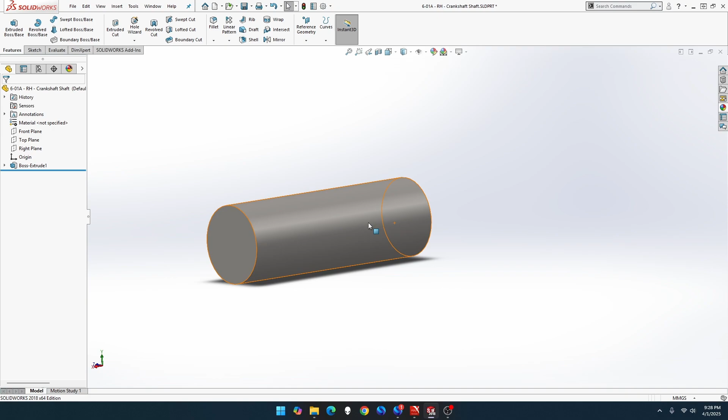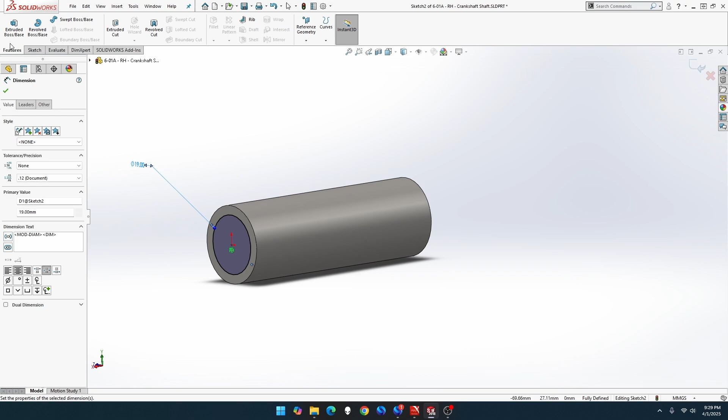There we go. Now this end here, we're going to go to sketch, circle, touch the outer edge, which brings up the center, which is in the XY coordinate there anyway, center of origin. That's going to be 19, that's smart dimension. 19, that's going to extrude out by 12. And done. So that's part 601A, right-hand crankshaft shaft done.

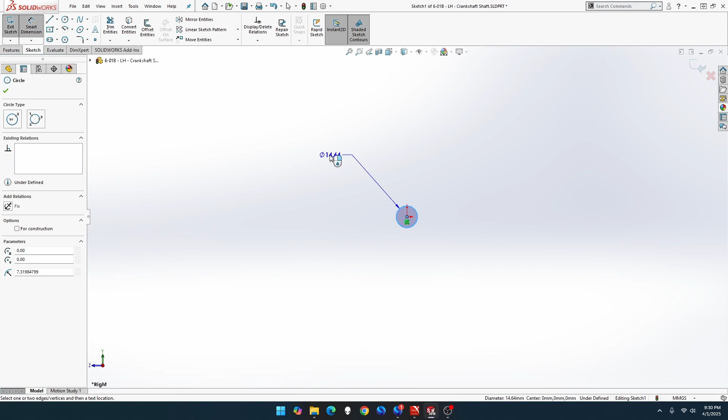Back down there, zoom in. Thank you, just so we can see it better. Up, zoom out a bit. That's going to be extrude, extrude the 12. Done. Let's do that one steel as well.

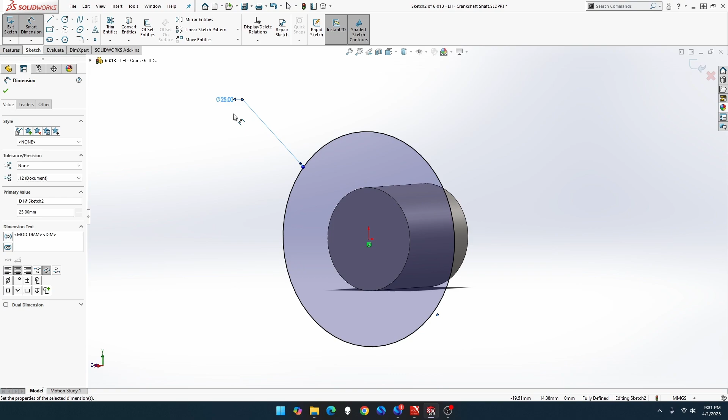There we go. Then we're going to do this face here, the circular face. It's going to be sketch as well, and it's going to be circle. And that's going to be dimension, that's going to be 25. That's going to be extruded out by 71.5.

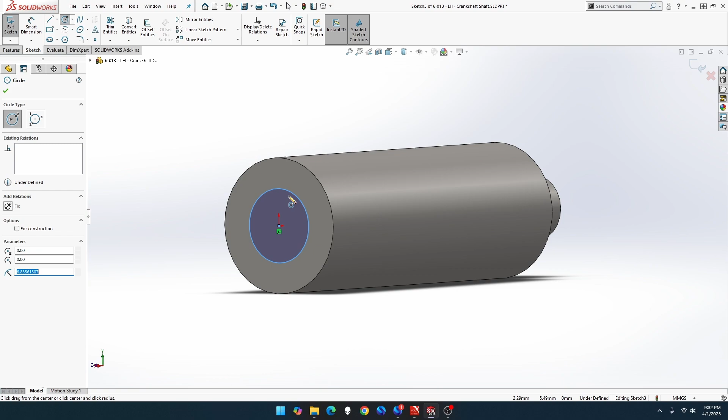Then we're going to do a sketch there, on this face here, it's going to be a circle as well. It's going to be 22. And that's going through that by 60. Thank you.

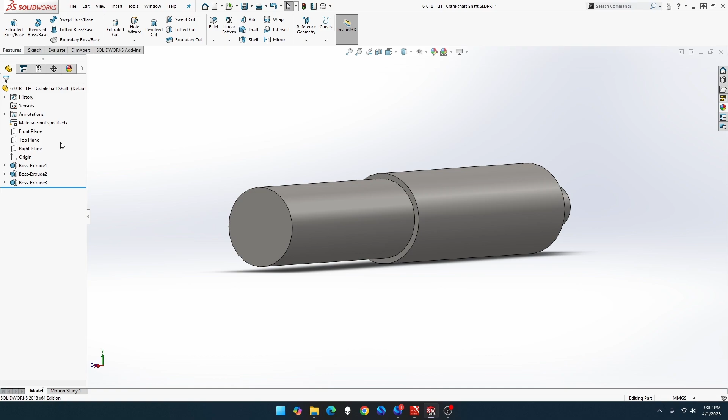Now we need to put 2 holes in this part here. One's going to be going up and down, one's going to be going left and right. So let's do the front plane first. Normalize. Let me just go that way. Doesn't matter which way, I just like to have the same weights in the drawing. Just for personal preference.

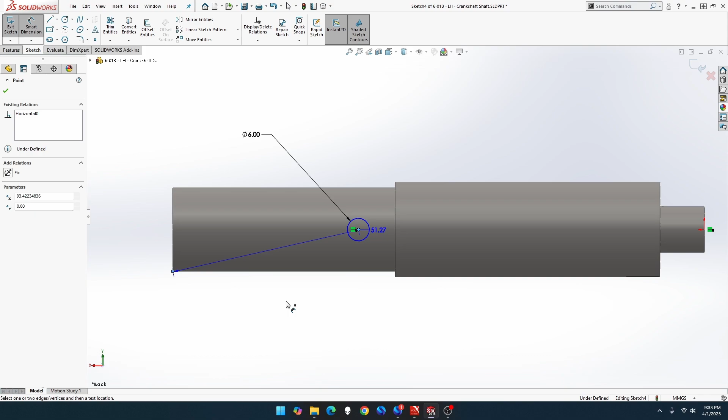And then we're going to sketch that. Now it's going to be 6 mil. Let's go 6 mil. We do that center point to the origin there. It's going to be horizontal, that's locked in that way. That's going to be 6. And that's going to be from this point or this line, works either way, to that point, it's going to be 51. Oh, it's far off, 51.

Now, because it's halfway through, we now go feature, extrude cut. This line works through, but this goes through all. It's second way through all, and done. There you go. So that one's done.

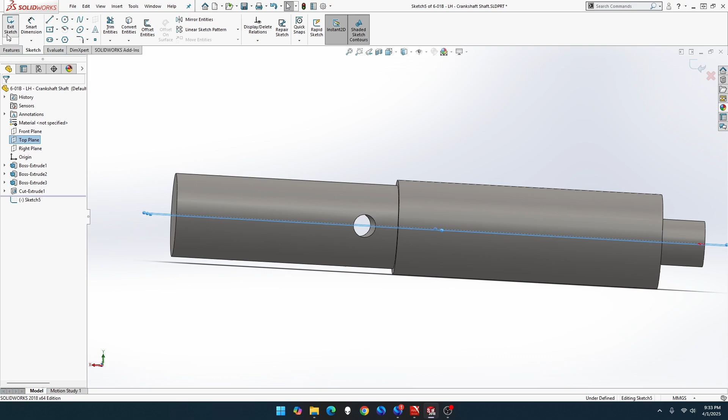Now we want the right plane. No, sorry, not right plane, top plane. Oh, I'll cancel that, we want to go normal to first. Always goes the wrong way. Okay, it's not flipping back and forth, that's fine. It's going to be sketch, circle. It's going to be 6 mil as well, I believe. Yes, it is, 6 mil.

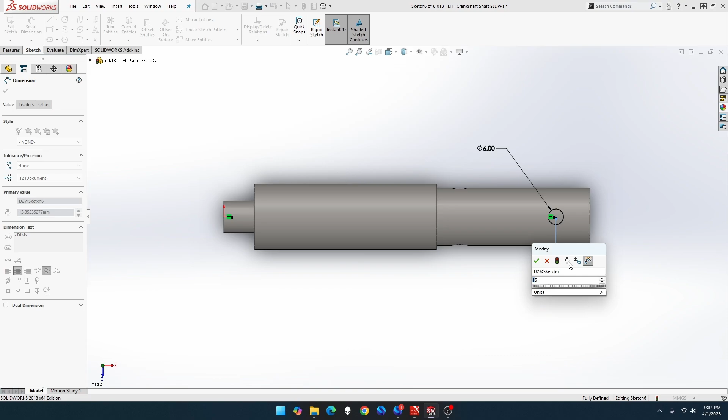That point is going to equal that point, so the center origin there to the center of the circle. It's going to be horizontal. Smart dimension, it's going to be 15 from this line to the center point. 15, you can use the point or the line, works either way. Now if we go to exit out, extrude cut, through all, direction 2, through all. There we go, obviously. And that should be it.

That's it for part. Oop, wrong one. That one, thank you. That is part 601B, left hand crankshaft shaft done. Let's move on to the next part.

Alright, so I go file, new, part MMGS. Okay, this is part 601C, the middle crankshaft shaft. Let's go right plane, circle, sketch, sorry, then circle.

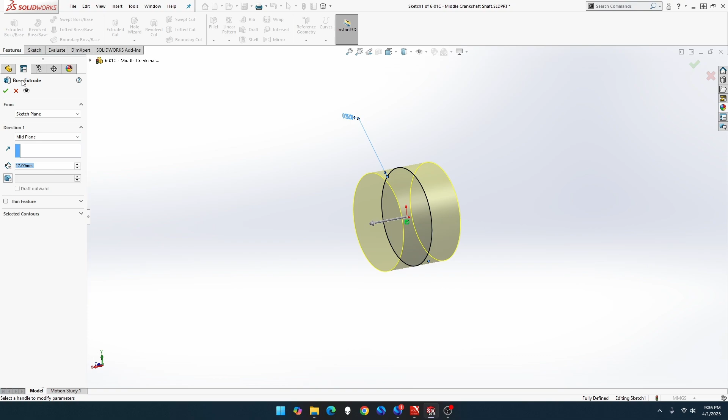That's going to be 25, so smart dimension 25, 25. Now you can do one of two ways. Let me piece this part off. Feature extrude, and it's going to be 17. If we go mid 17, okay, let me just change that over to steel before I forget. Now it's got a cylinder this way and this way, so you can edit that way, pull it out, edit the other way, pull it out, or go halfway and extrude out each way at the same distance. But I'm just going to go with this way.

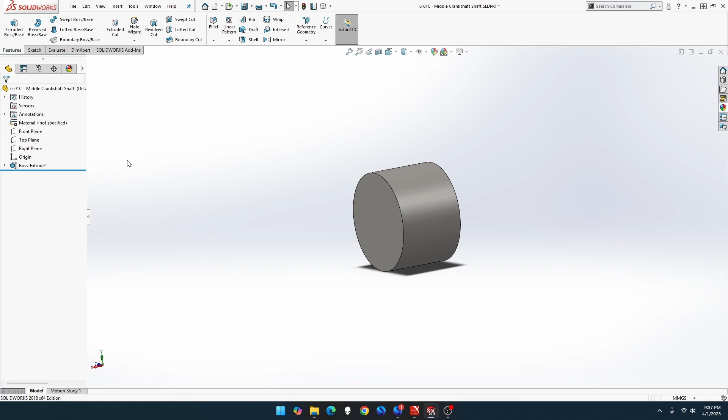Just got a dimension straight there. Yeah, work it out easily, but just one thing to worry about. Actually, no, let me go to front, right plane. We're going to edit sketch. We're going to do a circle.

That circle will be, where are we? 19. Now we're going to do feature extrude. It's going to be extrude up to, that's 17 divided by 2 plus 12.

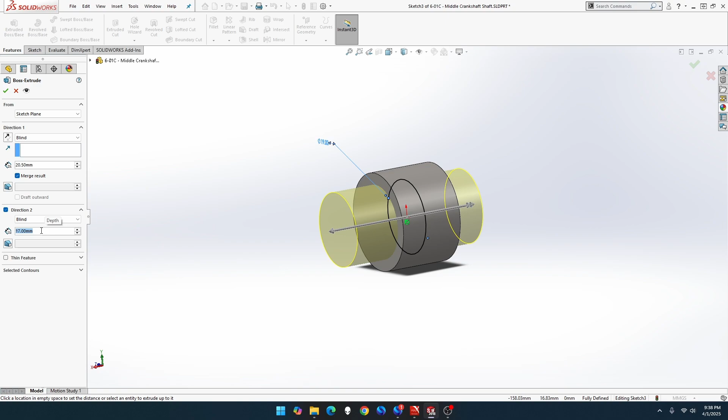Now we're going to extrude the other way, which is going to be 20.5, 20.5, and done. There we go.

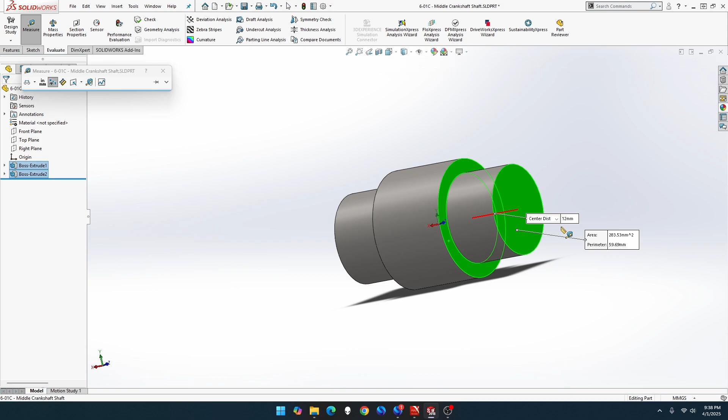Now if we just go with evaluate, measure, we click on this face and that face, that should be 22. 12, sorry, my mistake, 12, not 22. 12, which is correct. And this side should be 12 as well. There and there, which is 12 mil. Perfect, and that's that piece done.

Let me just zoom that around. There's a way to turn a shadow off, I can never remember how, I keep having to look it up.

That's part 6-01C, middle crankshaft shaft done. Let's build the next piece. Let's go File, New, Part MMGS.

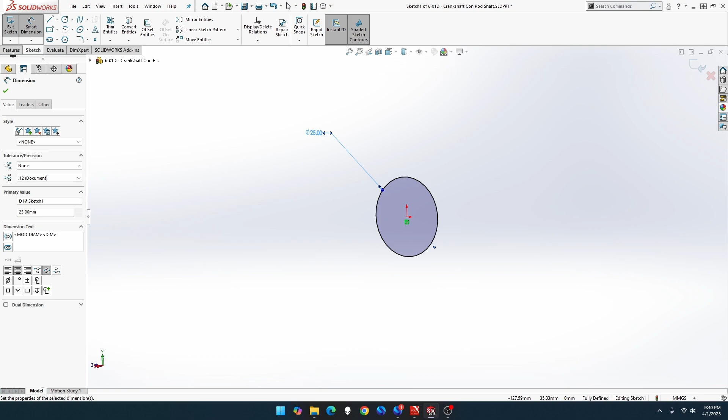That's going to be 19, I believe. Sorry, 25, 19 is smaller pieces. 25, that's going to be extrude of 29. I'm looking at the wrong dimensions. Extrude of 29, I'm just going to do that mid-plane. Okay, let's do that one there.

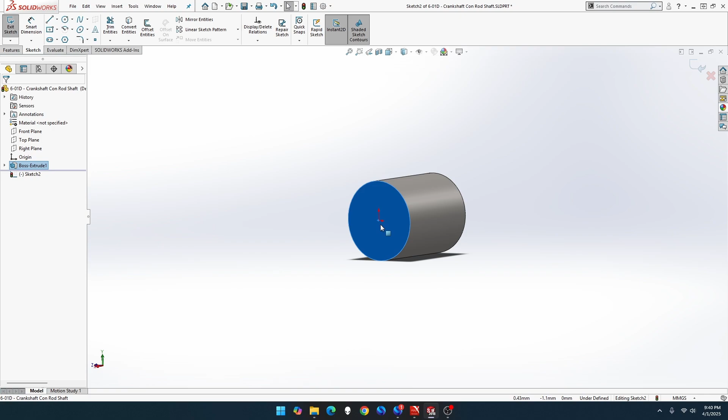Beautiful. Now we're going to do this one from each end this time, so you can see both ways. So we've got circle, do sketch on that end first, but circle. That should be the center of that one. It is. Oh, help to select circle, right? There we go. So why is that not showing up? It helps if you have the item selected you want.

Now this is 19. Feature extrude 12. Done. There we go, beautiful.

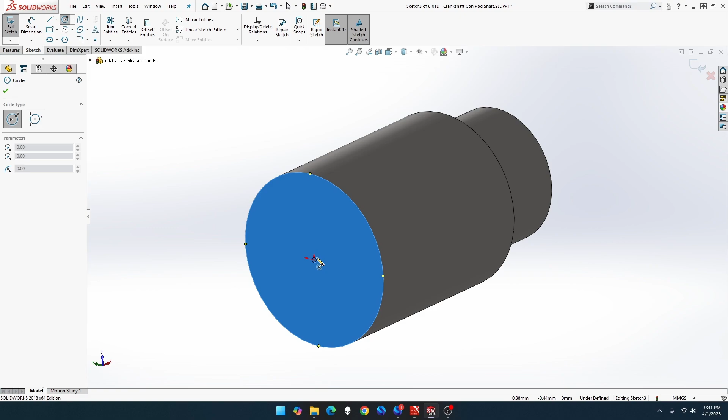Right click that one, sketch, circle, touch on the other circle. Thank you, touch on the other circle and change its center point there. It's going to be 12 as well. 12.

19, done again, didn't I? 19, it's going to be extruding at 12. And done, there you go. That is part 6-01D crankshaft conrod shaft done.

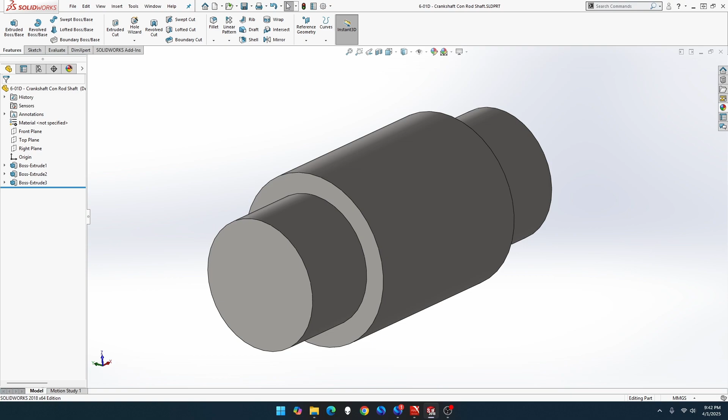Got one more piece and we start assembling it. Let's go File, New, Part MMGS. Alright, this is part 6-01E, the crankshaft crank cheek.

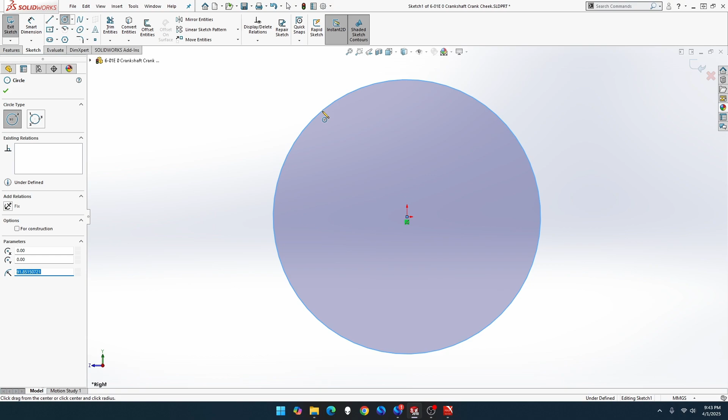So let's do right plane again, sketch. We're going to do a circle. That's going to be diameter of 76, yes 76. Perfect. And then we're going to do another circle, one there, one there. Those two will be vertical.

And these two, click on the outer edge, will be, not that one, equal. And that is 19, so smart dimension, 19. And that's going to be center point of the circle to center point of the drawing. Go this side, 19.

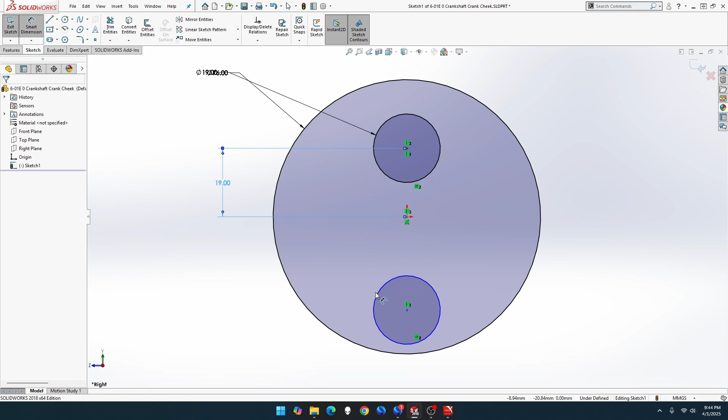Oh, one thing I've got to do, this center point to one circle vertical. There you go, now locked in. I think, why did it not lock in? Yeah, because I put the two circles vertical, but then put it vertical to the center point. And that's going to be... oh, cancel, center point on one, my bad. There we go. 19.

Okay, so now we've got another hole. Bring that one up to about there. That's going to be 6. 6.

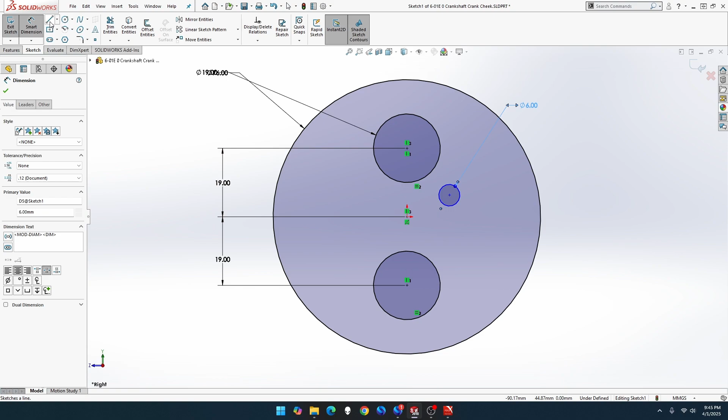We're not going to dimension that just yet because I've got to do something else. So we're going to go line, click on those two points there. Oh, don't want curve. And one this side. Make those two parallel, actually, yeah, parallel.

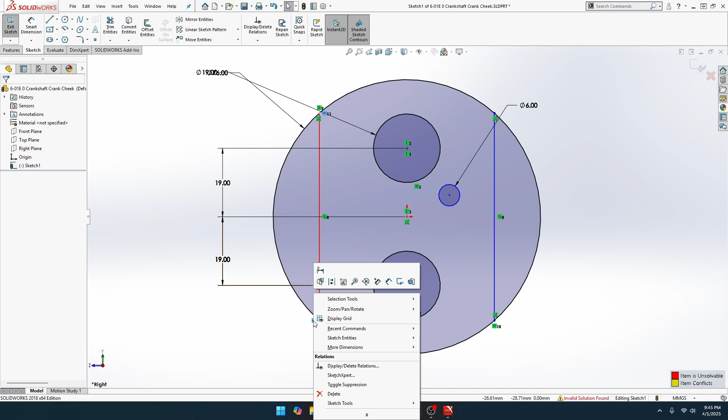Point to point is going to be vertical. Now this point and this point of the end line will be horizontal, and those two should be horizontal already. Why is that over-defined? Oh, I already got one there. To delete one of these points, just click on highlight and press delete key. It's no longer over-defined.

Now for dimension, we want center point. Actually, you don't need to do this, but it's recommended. I'm going to put in a center line instead. Smart dimension, center point line to that line will be straight. That was 19.

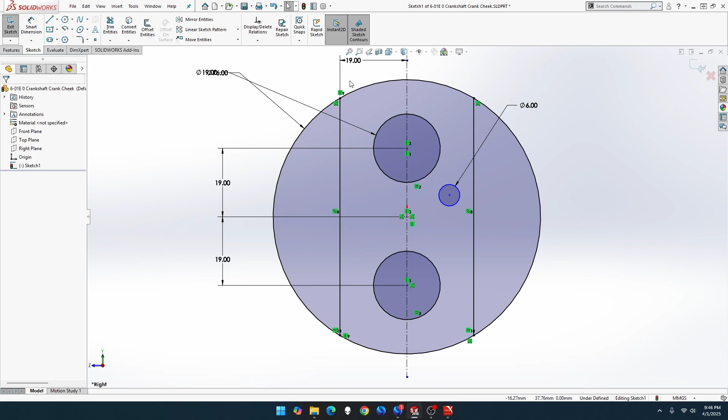Now we go to trim. I'm going to trim that one and that one. So that did not break. Let me bring that one down there. It did not break the dimension on that because it's still got dimension there.

So everything is black except for this line, which is blue. Let's now go back to dimension. That is 9.8 from center circle to that line. And that's going to be, from this center point to that center point, 12.6. That's locked it in.

You don't want that line there for the circle, just move that down there. But I don't mind that one. Everyone has their preferences. Let's just pull some of this in, make it a little tidier. Pull that in there. Actually, I can bring that one down there. Actually, nope, that can go there.

It doesn't really matter. Well, it does. It keeps it tight, so if someone comes in to do the drawing later, the numbers aren't all mumbo jumbo everywhere. Sorry, one of my pens got in the way of my mouse. Put you back there.

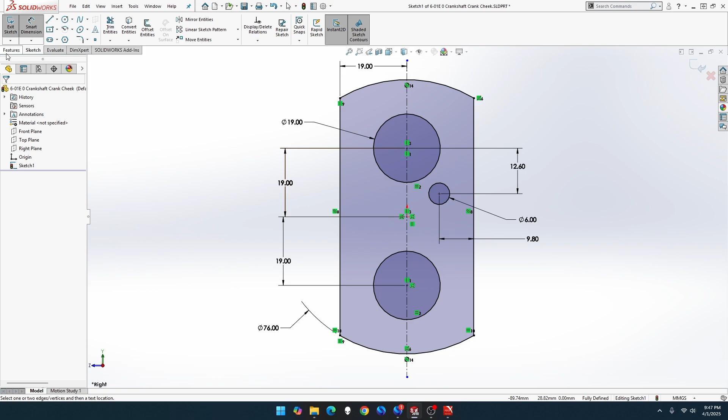Okay, so now let's just double check. Looks good. It's going to be an extrude of 12 mil. I'm going to do blind on that one.

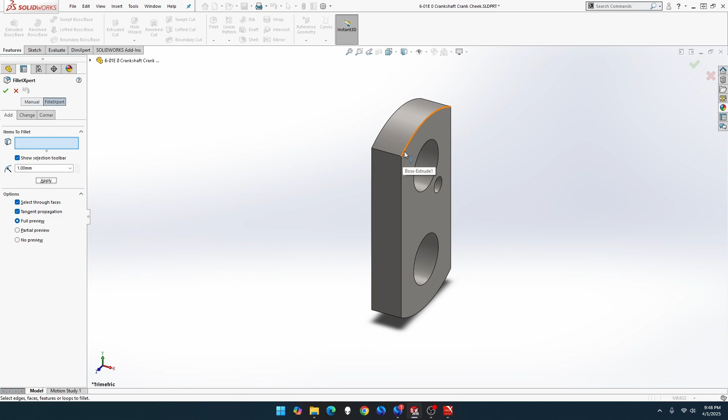Now we want the steel, and we want a fillet of, let's try one, see what that does. Looks good. And do this side as well, and that one there. Beautiful, that should be done. That's it.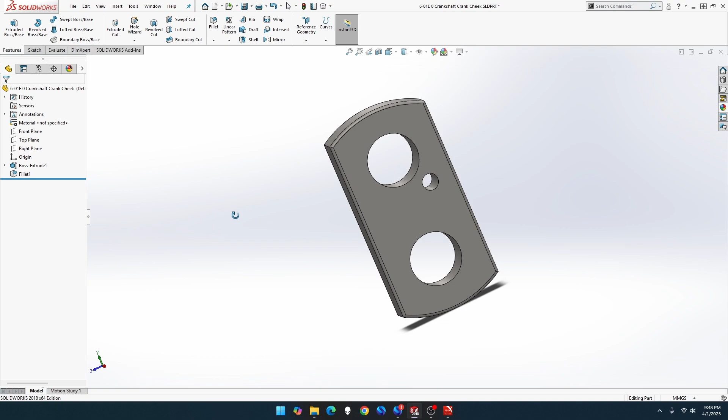Let me just zoom this around a bit so. Oop, not there. That looks good, I'm happy on that.

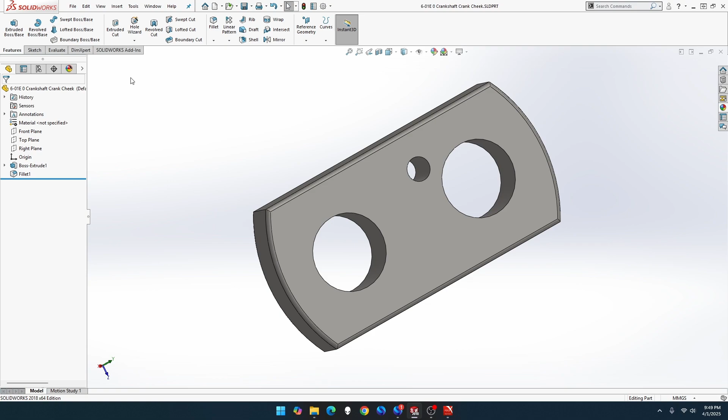All right, let's assemble this now. Let's go to File, New. It's going to be Assembly MMGS. Let's go to View, Hide Show, Origin.

And I'm going to put part A, I guess. Let me just click on that icon there, so that this doesn't close down. So if we bring that one across and click it there. Now we want 6.

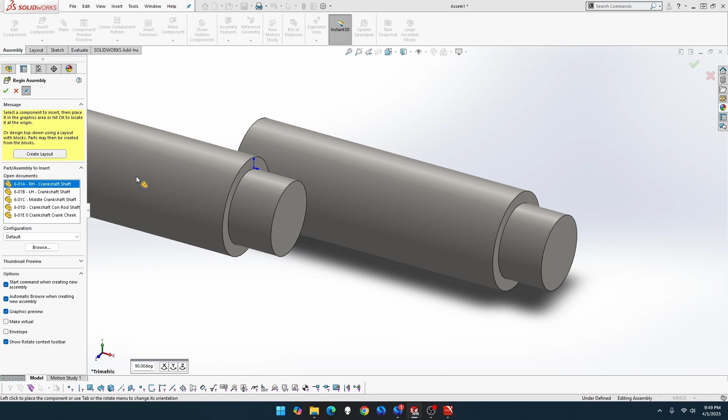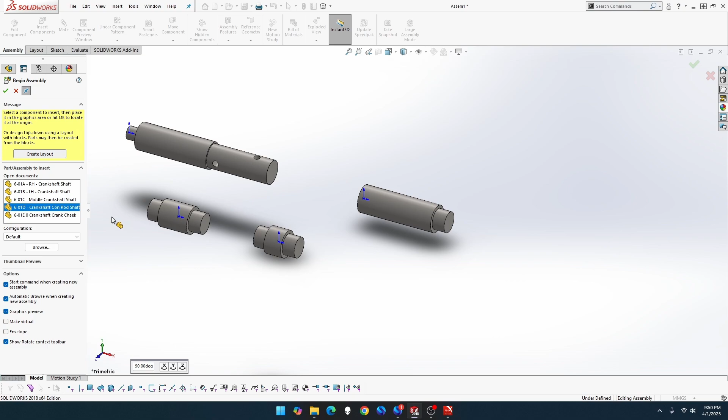I think we've got one of those. Yeah, one of them. B, there's one of those, I believe. Yep, one of those. C, there is one of those. D, one of those, and then E, sorry, there's 4 of them. So 1, 2, 3, and 4.

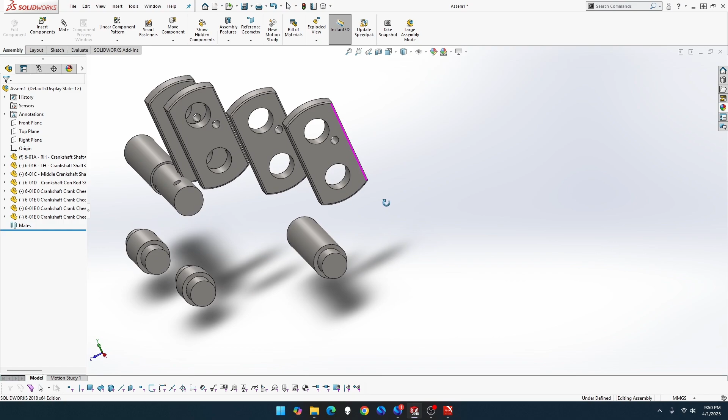And that one's done, there we go. Let me turn that origins off, it's so overcrowded there. There we go. All right, so now we want to turn it this way. There we go.

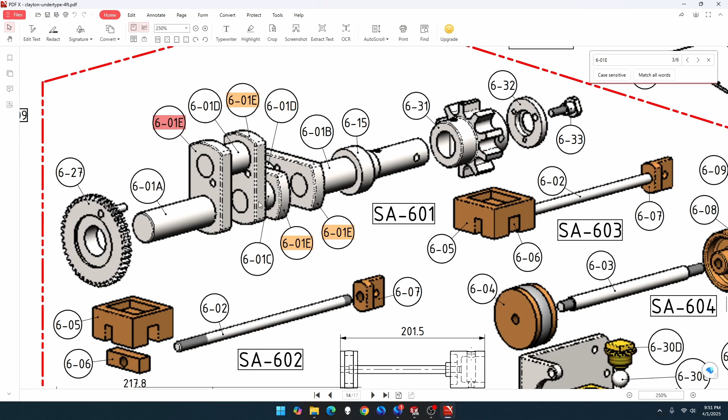So let me keep that piece. Oh, hold on, that way. Nope, that way, sorry, my bad. I'm trying to keep it lined up with the piece here, same reference to here, so that way I can see. Let me just move you up there. Which one? That's one I can't move. Okay, that's one that's locked in.

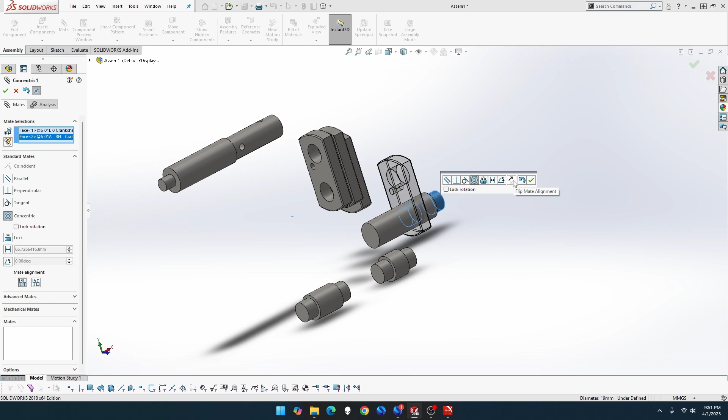Now we want this one vertical, so let's do this face to front plane. There we go. Okay, let me get out of that.

Now, if you do too many mates in one row, a heap of mating, and you make a mistake, Control Z is going to undo all those mates together. That's why I like to do a couple of mates, okay, a couple at a time. That way I'm not clearing a heap of mates already done.

Okay, that's good there, the holes on that side, good. Now we want, that was E, we want D. That's C, D, there we go. Mate, circle, beautiful. Now we want that edge there to that edge there. Beautiful, just going to okay that one, so I don't have to do it again.

Now we want one of these. Yep, so we want mate.

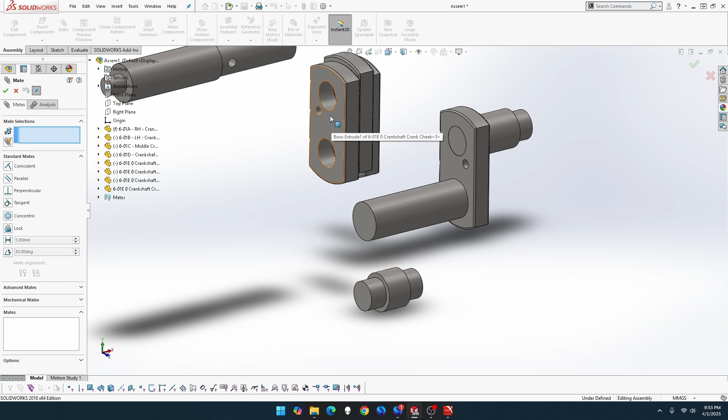Circle, inner circle to outer circle. Now, if you click on that, you can actually drag these out like that. So if it's in line with something, you can't get to it. It's a flip adjustment.

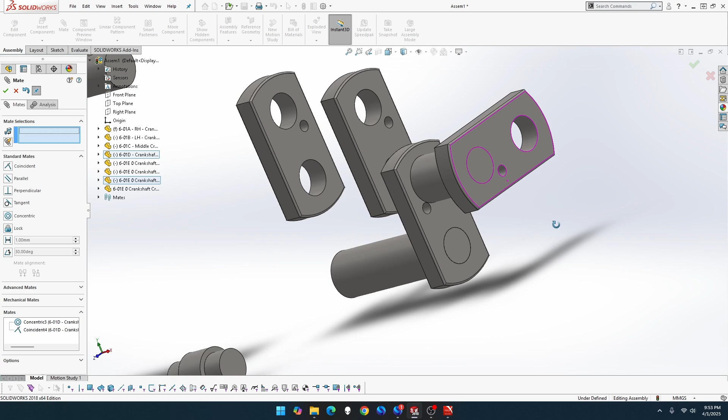And then we want this face in line with that face. There we go, it's looking good. Now we want, probably going to be this one. C. Yep, C. On that, thank you.

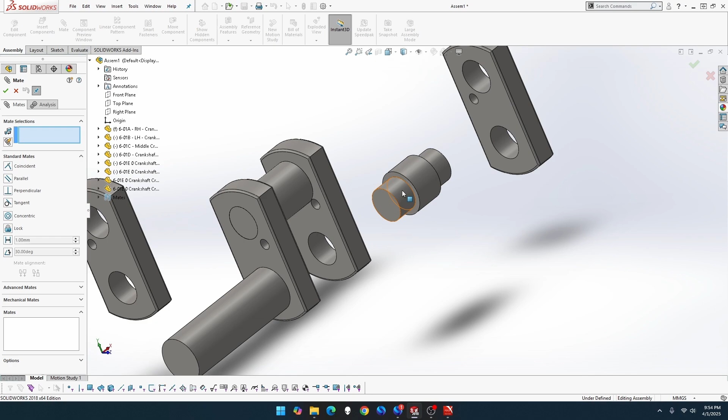Now we want mate, circle. Outer circle this cylinder there to inner circle of the hole. That face there to that face there. There we go, looking good.

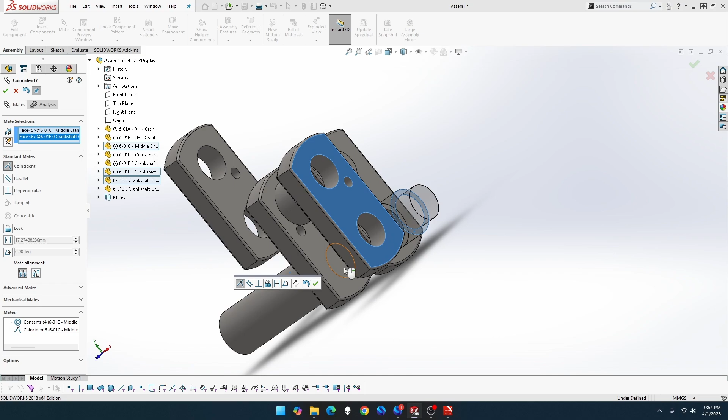Now let's try something different this time, a different order. That face there to this face there, but let's flip it. There we go. Circle. Oh, we didn't get any message saying it corrected something.

Okay, but now we want this face there, we want that to be top. And just confirm, yes, that's the correct way. When you look here, piece there, 2 uprights and 2 going to the left as it stands.

So now I've got to put the next piece in, which is D. Oh, I need another D. Okay, if I grab this D here, that should be D. It is. Remember correctly, shift. Nope, sorry, control, drag, you can create another copy. Control, not shift.

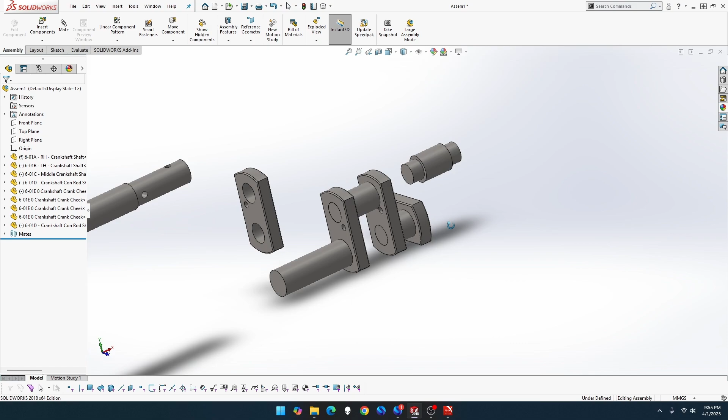That way I don't have to worry about it. I could have gone up here and gone insert and clicked on one there, but it's just quicker that way, quicker to go over here to insert, quicker to drag. Depends on the situation.

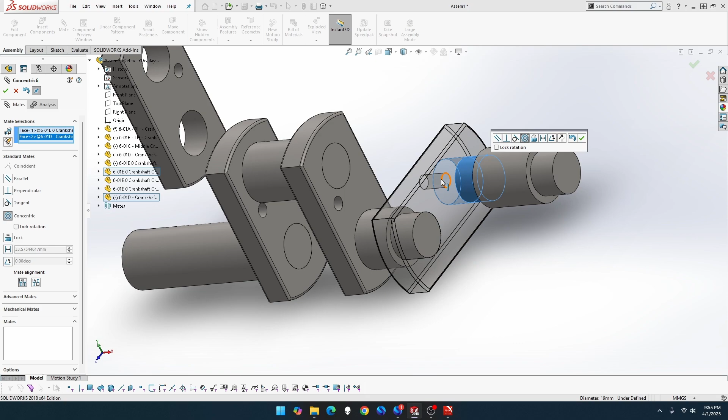Okay, mate, inner circle, outer circle. Let's double check. Yeah, the holes are pointing up. I just want to make sure these holes were right. Yes, this face to that face.

Now we want that face to this face, but let me flip it. I think I've done that right. Yeah, it should be this circle to that circle. Flip it. There we go.

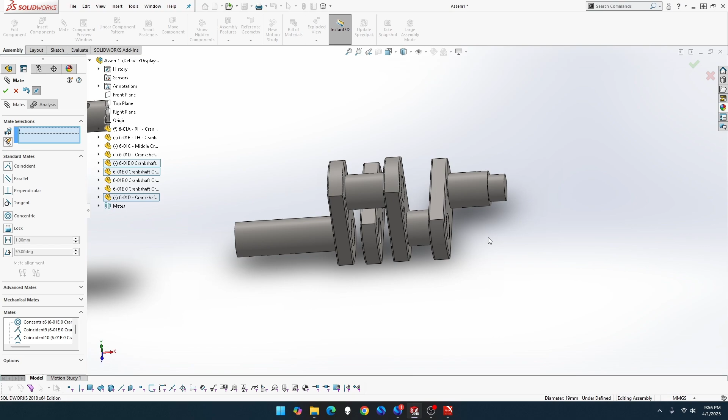This face, oop, this face, thank you, to that face. Okay, we'll tick, and tick. There we go, beautiful.

Now, there is some parts on here, 6-01B. Hold on. Did I make a mistake on this one? Let me right click and open that one up. I think I made a mistake there. Let me double check that. Did too, that should be 19.

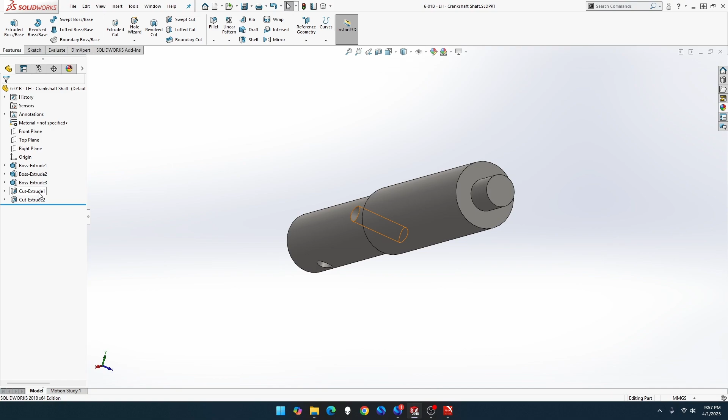What the heck did I do there? Oh, I did 12, probably should be 19. You probably want to yell at me on the screen, sorry about that, 19. There we go, that's better.

Now save that. I can go back to the previous one, or I can just go up here and click this once it's saving, this traffic light, which will refresh everything. There you go, now it's correct size, that's better.

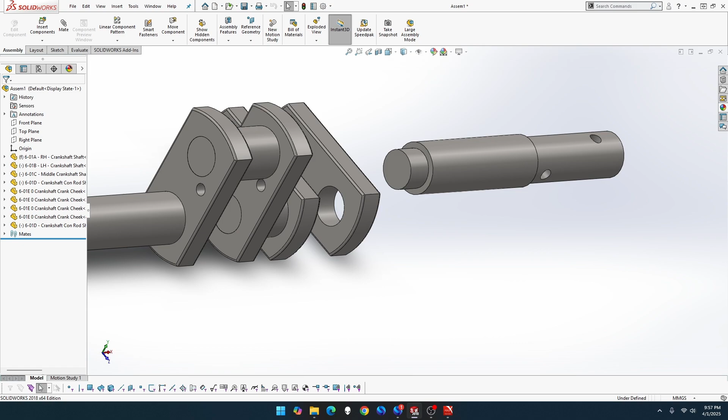Now let me go back down. Now we want mate, inner circle, outer circle, that wall to that wall. Now this needs to be turned like that. Is okay of that one.

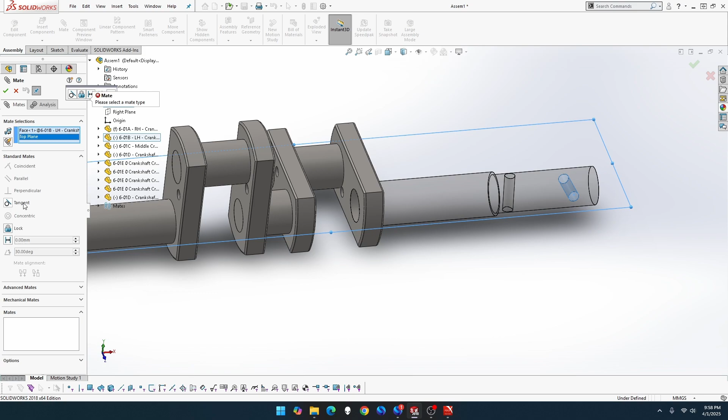So what does this work? We go mate, if I click on that circle, if I go to top plane, okay, if I do tangent... please select the mate type, tangent. We'll break other mates, okay, no, cancel that.

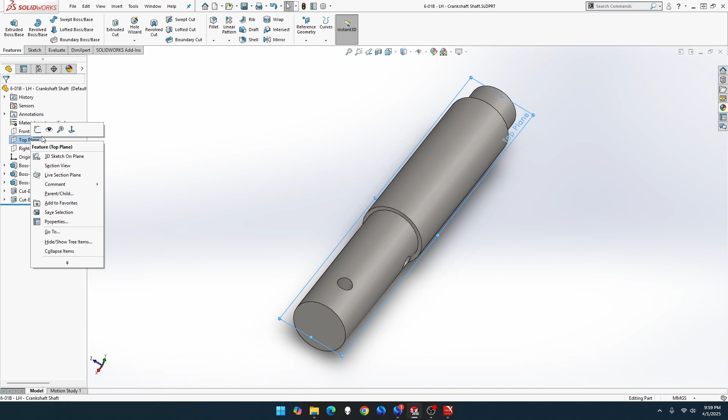Okay, one way I can think of doing it is, let me go back to that one. Let me go to top plane, normal, top plane, sketch. We shall go to center line. Put that vertical dimension, let me go back to my drawing up here.

That's going to be 6 from there to there, plus, not 6, sorry, from this point to this point it's going to be 51. There you go, it's locked in.

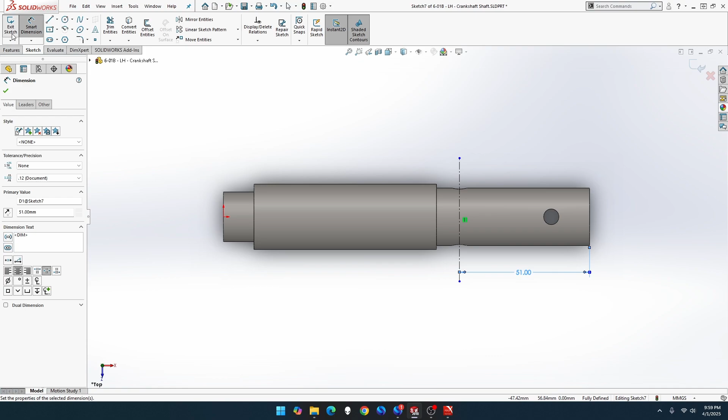Exit out, so I need to go back to the other one. And that will be, let me scroll down. There we go, that's pointing upwards.

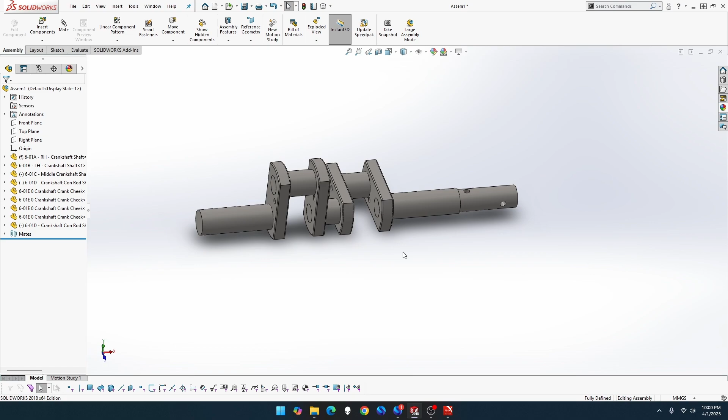So if I go to mate, if I go to this point here and go to, not top, front. Okay, there you go. That's now locked in, and I can actually hide that there, so that can't turn. So that is now locked in. Oh, very nice.

Okay, this is, nope, go back, hold on. That's a crankshaft done, and the assembly is SA601, for the Clayton Undertype Steam Wagon. So we built 1, 2, 3, 4, 5, 6, 7, 8, 9 parts, but 4 of them are the same - 4, 5, 6, 7, 8, 9. So I'm very happy about that.